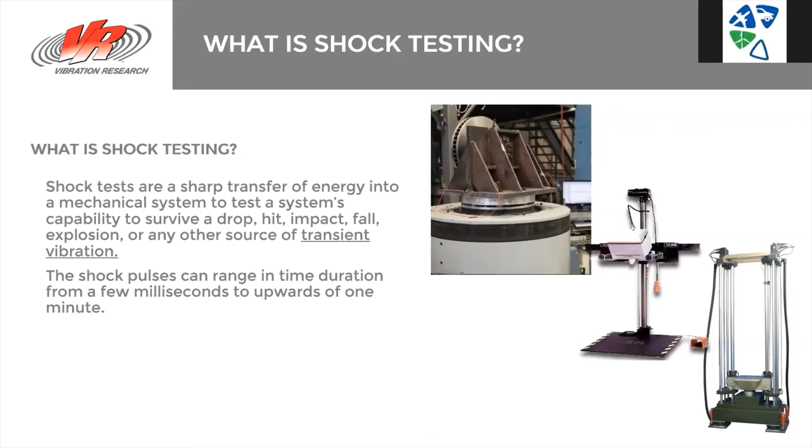Perfect. All right, so when we're characterizing a shock pulse, what are the things that we need to know about it? So number one is we need to know the acceleration of that pulse. We also need to know the pulse width, the duration, the rise and fall time. When we're analyzing the pulse, we'll analyze the velocity change. We'll need to know the pulse shape. Is it half sine, initial peak?

We'll look at the Fourier spectrum. So we'll also need to understand when we're running a shock test, what are the frequency domain implications of that test, right? And the frequency domain implications of the pulse shape that we choose. Also, we can look at SRS, the shock response spectrum. So defining the pulse not in the time domain, but in the frequency domain.

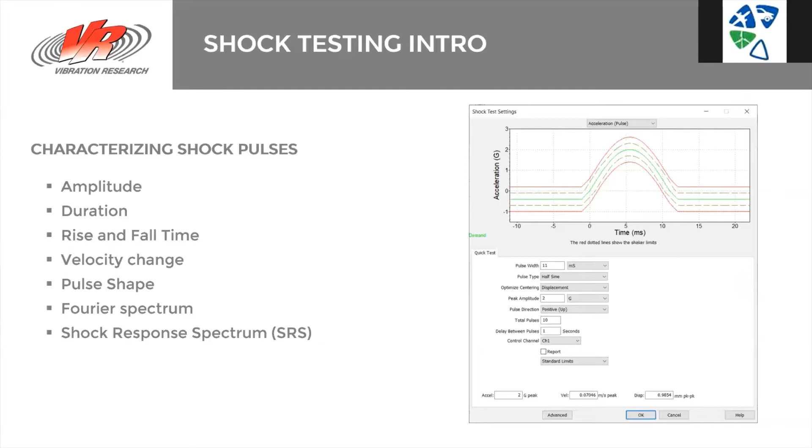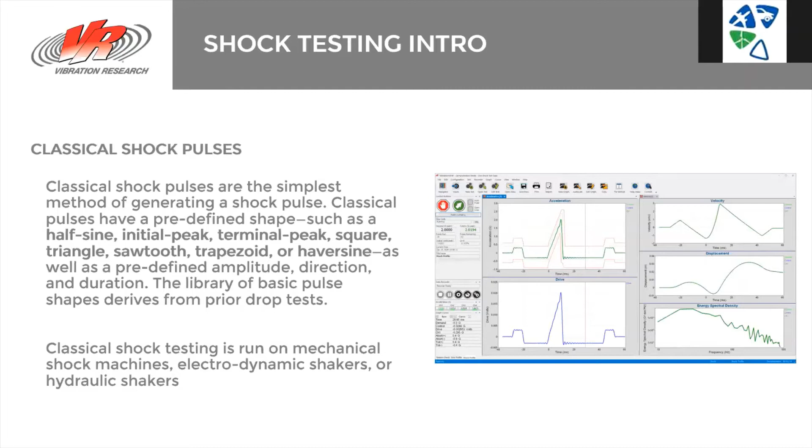Okay, so when we're talking about shock, what are the types of pulses that we commonly see, especially when we're talking about ones that are run on a shaker? Well, we see things like half sine, initial peak, terminal peak, square, triangle, sawtooth, all types of different pulse types. In the next few slides, what we're going to do is analyze those and see what's the benefit of running one or another. So let's get into the first one.

By far the most common is the half sine pulse. This is what we call the traditional method of shock testing, fairly easy to reproduce. The frequency response is fairly smooth, but what we see is reduced high frequency content, or what we call holes in the higher frequency. So what that means is if we have a product with resonances that are in the higher frequencies, if we're using this pulse, we may not excite those. So let's look at an alternative.

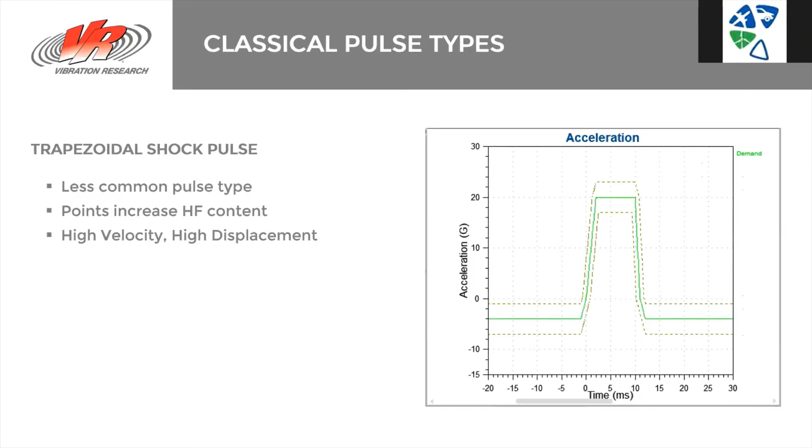So the terminal peak, also known as the sawtooth shock pulse, many of the newer test specifications are using terminal peak rather than half sine. And the reason for that is the sharp point and peak increases the amount of high frequency content. So what we see are fewer holes or a flatter spectrum. Then finally, another less common option is the trapezoidal shock pulse. And this further increases that high frequency content, but we also get high velocity and displacement.

So if we look at these three pulse types in the frequency domain, so we'll look here at these ESDs, we can see that the half sine is the green wave, terminal peak is the red, and the trapezoidal is the black. We can see here, if we look at the half sine, the green, when we get to the higher frequencies, so from 100 to 500, we start to see these big dips or holes in the frequency.

Well, if you remember earlier, we said that if you're running a half sine pulse, you may not excite some of the higher frequency resonances. And the reason is because of these holes. So for example, if you see a 150 hertz resonance on your product, well, if you ran this pulse, unfortunately, in this test, that would not have been excited with that shock test. So the most damaging frequency was not even being excited for that test. But if we look at terminal peak or trapezoidal, right here, we would still see the energy there, and that would still be excited during the shock pulses.

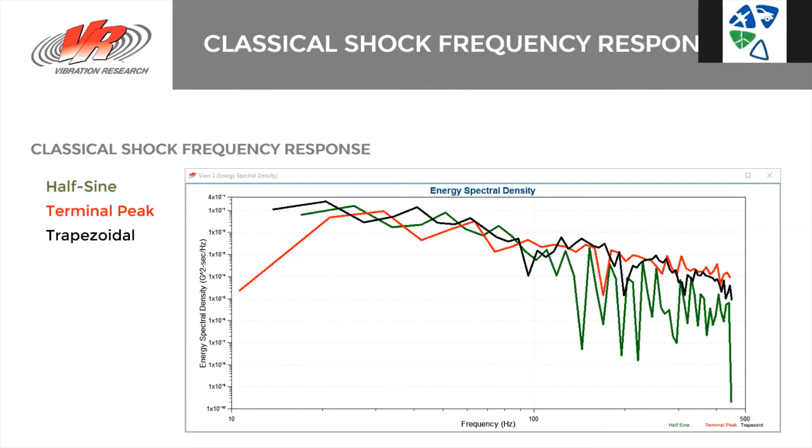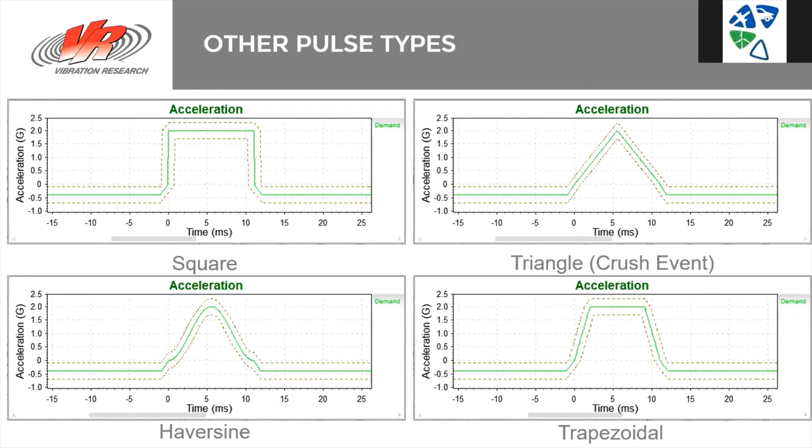Okay, what are some other pulse types that we see? Well, we'll see the square, triangle, Haversine, trapezoidal. And if we look at those, we can also analyze them in the frequency domain. And we see as well, they have different responses. Some of them have very high frequency responses. Some have more energy in the low frequency. But here we can understand how that pulse is going to affect our product.

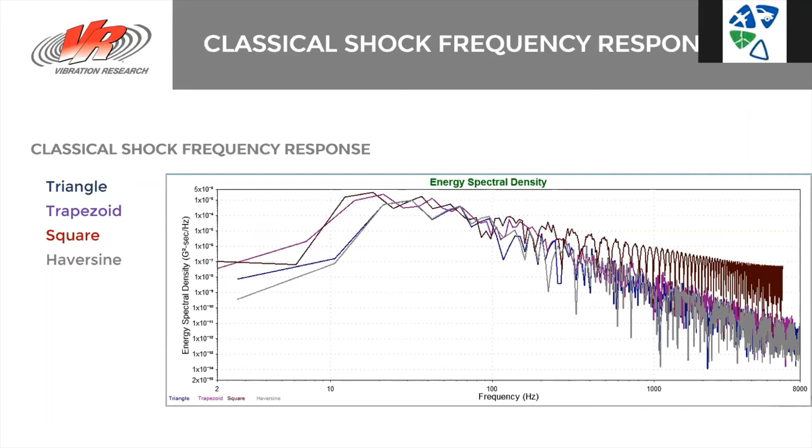Okay, next we're going to talk about the pulse compensation. And so if you've ever run a shock pulse on a shaker, you'll see that you don't only see the big pulse that we just discussed, right? You also see a little pulse before and after. Well, why do we need that? Why does that exist? Well, it's needed because we need to return the shaker back to the zero position, right? So at the end of the test, we want acceleration, velocity, and displacement all to return back to zero, right?

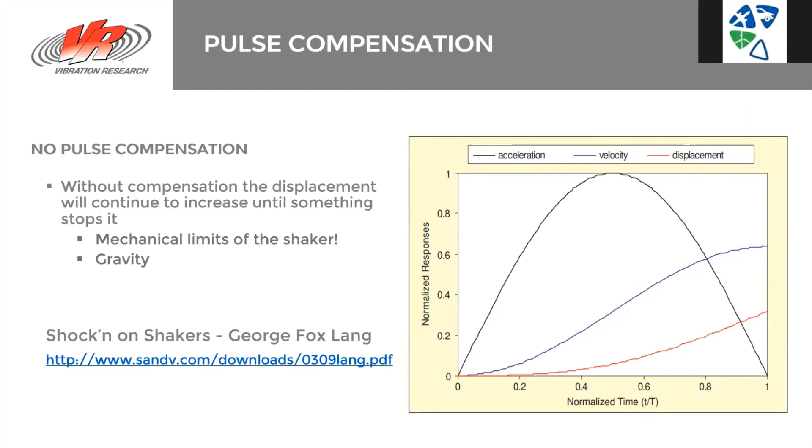Okay, so why don't we then just put one pulse after the main pulse? Well, unfortunately, if we look at it here with one big pulse, this is the acceleration, and then we see a little pulse at the end, a small burst of acceleration here. What we see is that the velocity returns to zero, but the displacement doesn't. So unfortunately, if we tried to run it this way, the displacement would not return to zero on our shaker with only one pulse.

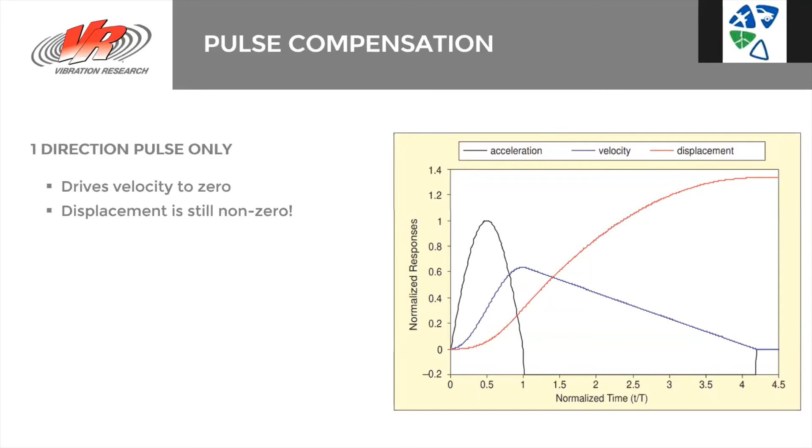Okay, so why would we ever purposefully do that? The pre-pulse only, there are some applications where they want to see what's happening with the product. So for example, a hard disk drive, what they want to see is that right after the pulse, the main pulse, is see if they can still read and write before there's another small pulse again, if you will.

Then also for post-pulse, for an airbag sensor, sometimes they don't want to give any type of pulse before the main one because they want to make sure that the main pulse is what's triggering it. They don't want to preload the sensor and invalidate the test. So there are some applications for tests that do not use both pre and post pulse compensation, but they're very specific.

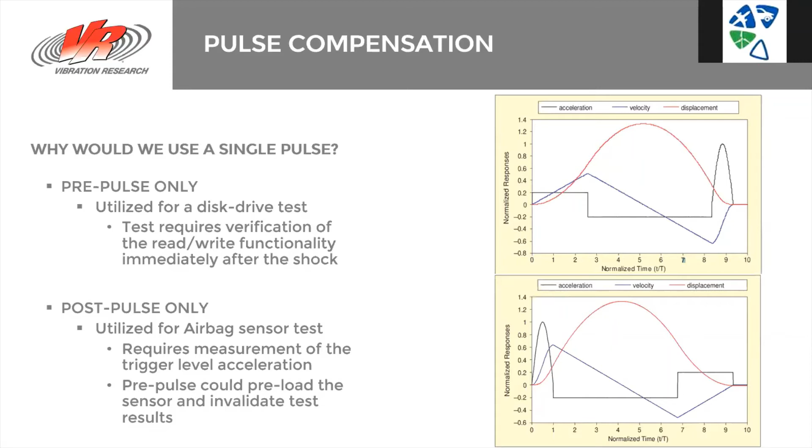Okay, so the typical shaker test, as you know, uses 2 pulses. As we can see in the graph on the right, we can see the acceleration, velocity, and displacement overlaid. As we run the test, all 3 acceleration, velocity, and displacement return to 0 at the end of the test, right?

So when we look at selecting this inside of the VibrationVIEW software, there are 2 options to the type of pre and post pulse that you can select. So one is what we call our smooth shape, and that's here on the top. And the next one is called our square shape. And one is designed specifically to reduce the amount of high frequency content that's added to the test, whereas the square shape is designed to be optimal for minimizing velocity and displacement.

Our default is the square shape. That's what's recommended. We also have these 2 without displacement centering. That would be for a very, very small amount of people that have an external device that is recentering their shaker.

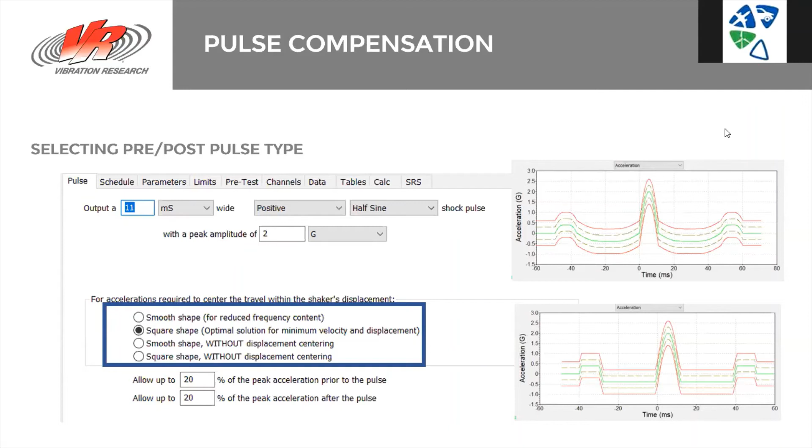Okay, so let's actually look at a video. So remember, we're not going to be able to visually see the acceleration. So what we want to look at is the displacement, because the displacement is what we're seeing on the shaker. So let's watch for displacement that goes up, down, up again, and then returns back to the original point. So let's look at this short video.

Up, down, up again. Up, down, up. So let's look at that one more time here. Let that finish up. Up, down, up. And so if you'll see right there, it's at the midpoint, goes up, down, up again, returns back to that middle point. And so the pre and post pulse allows us to get that nice transition that we're expecting.

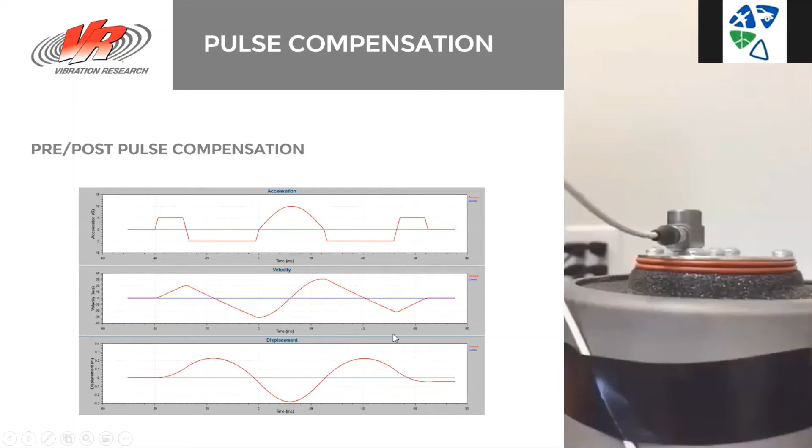Okay, what are some other things that we need to consider when we're running a test? This is something that we put on all of our presentations because we think it's very important to consider. This isn't only related to shock, but it's related to any of the vibration tests that you're running. So you need to understand that noise can cause many types of issues during your test.

So if you're having abort problems, anything like that, we'd recommend, especially if you're running low-level tests, so not high-level acceleration tests, you want to look at these 3 things. So eliminating ground loops, making sure your shaker, head expander, and fixture are designed with an appropriate resonance for the test you're running. And then also make sure you're selecting the correct accelerometer.

So here you might see ground loops in your lab. If you have a single grounding point in your lab, what that means is that you have all of the equipment, the controller, the power amplifier, the shaker, all connected together and then running to one single ground point. Instead, the controller is plugged in one spot, the amplifier in another, and now the only thing connecting them are my input cables and my drive cable, because we don't want current to be pulled through those cables.

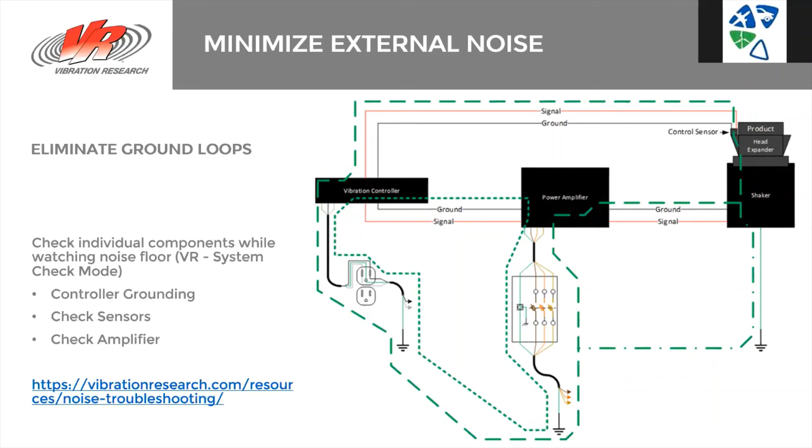Perfect. Again, we also want to understand what is the resonant frequency of my shaker, my head expander, and my fixture. You can do very simple sine sweep tests to understand the dynamics, but these are things that you should know already about your system so that your fixture is not moving during your test and causing inaccurate results.

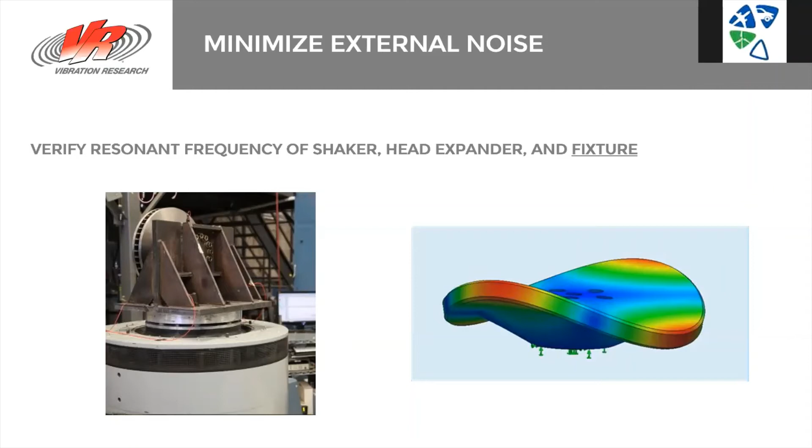Okay, and finally, for all test types, you want to make sure you're selecting the proper accelerometer. So work together with your distributor. CTEC is selling Dytran accelerometers.

If you're looking for an accelerometer, make sure that you're buying one for the purpose that you're going to use it. So make sure that the acceleration limits are correct for that test. Make sure it's designed to support the frequency range that you're going to be exciting in the test.

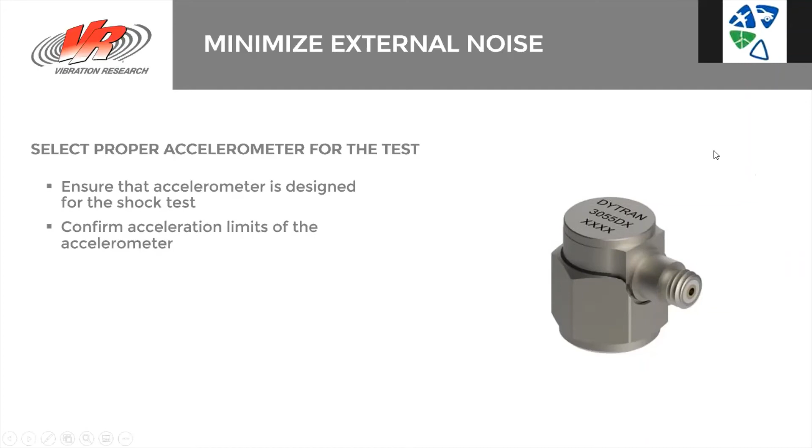Okay, back to the shock world here. Let's look at entering a shock profile. What are the things that we need to know? So in our software, when you first open a shock test, it'll open to what we call our quick test mode. And so this is set up with the minimum amount of information that we need to be able to run a simple shock test.

Because it's very easy to accidentally enter one number wrong, but fortunately, you'll sometimes see that show up as a very large displacement, or maybe the acceleration looks huge. You'll be able to catch a lot of errors that way.

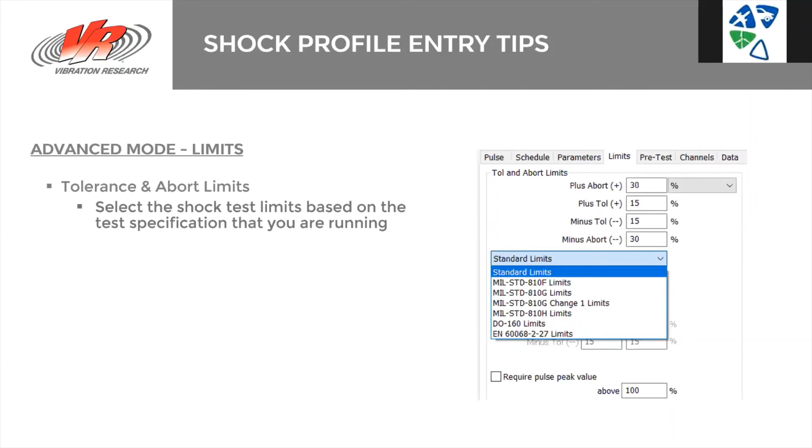So here's an example. Between MIL standard 810G and MIL standard 810F shock test, you'll see that they've significantly changed both the tolerance and the abort lines. And so to make sure that you're running the test correctly, based upon the specification, make sure that you're selecting the correct tolerance and limits.

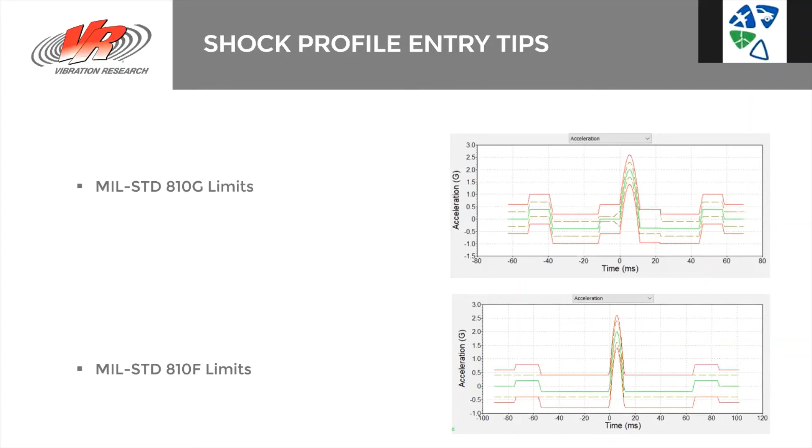Okay, what are some of the other parameters that we need to configure? I won't go too deep into these, but you need to configure the feedback control. And what the feedback control is, it tells us how big of a jump to make when we're doing the startup pulses. So as you know, the controller doesn't just directly come out and do a full pulse, right? It has to come out and start with a little pulse and make it a little bigger, make it a little bigger, learn about the shaker, right? And so that's what the feedback control will do.

Next, we have filtering, which will allow you to remove unwanted frequencies. So especially with our integration and differentiation filter, what that does is, especially when we're converting and calculating the velocity and the displacement, we need to make sure that those unwanted frequencies aren't coming into our data. Next, we can set sample rate.

And finally, one useful feature here, if you're testing products that have some type of ringing or some type of response after the pulse, you can capture additional time after that pulse. So an example would be if you imagine something like ringing a bell and that bell rings for some time. If you wanted to capture all of that after the initial pulse, you can add that time here. So that's one tip to get more time after the shock pulse.

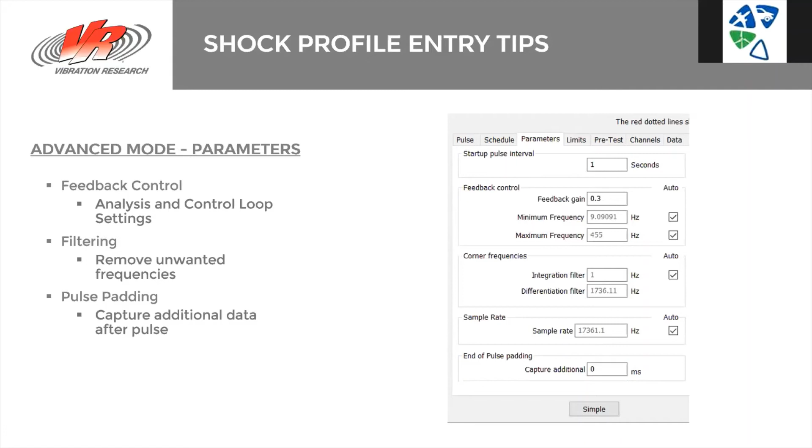And so whenever we talk about shock, we also like to make sure that we let you know that we do not recommend that you run multi-channel control for shock tests. And there are a couple of reasons. One, it actually puts your shaker at risk for damage. We can apply the system limits to multiple channels, so that does protect it to some extent. But if there's some nonlinearities in the placement, you could have an issue with the shaker. So use only one control channel when you're doing a shock test.

Another possible issue is because of the phase difference between the locations of the accelerometers, that can cause issues with control. So use one control accelerometer when you're running a shock test.

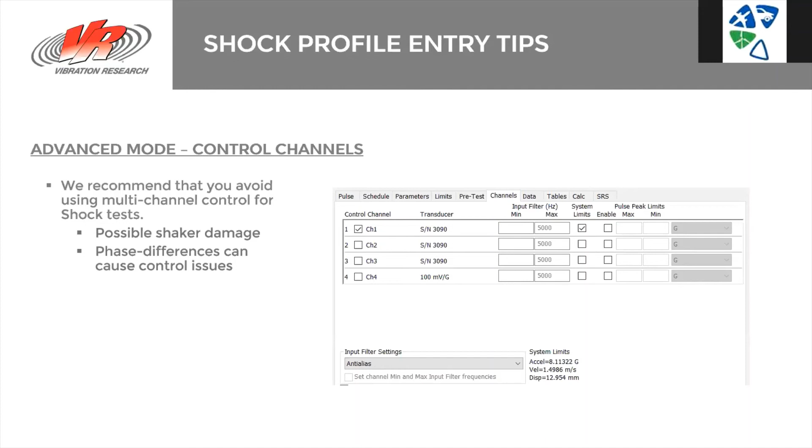Okay. Now, another tool that can be very useful is what is called the memorized drive. And what is memorized drive? What it does is after you run a pulse, it can remember what the drive signal was like for that pulse. And so next time you want to run that same pulse, you don't have to wait for those startup pulses. So this is very, very useful for applications like a satellite, where we want to only subject the satellite to exactly the shock pulse that we want for 10 times. We don't want 3 smaller pulses before that we have to consider in our analysis. We only want the 10, right?

So what we can do is, instead of putting the satellite on the shaker, we put a dummy weight, a weight that is the same as the satellite. We run one pulse, and then it'll memorize the drive from that pulse. We'll stop, and then you remove the dummy weight, put on the satellite, and now you can run the test, and it will just run 10 pulses because it will have the drive already memorized.

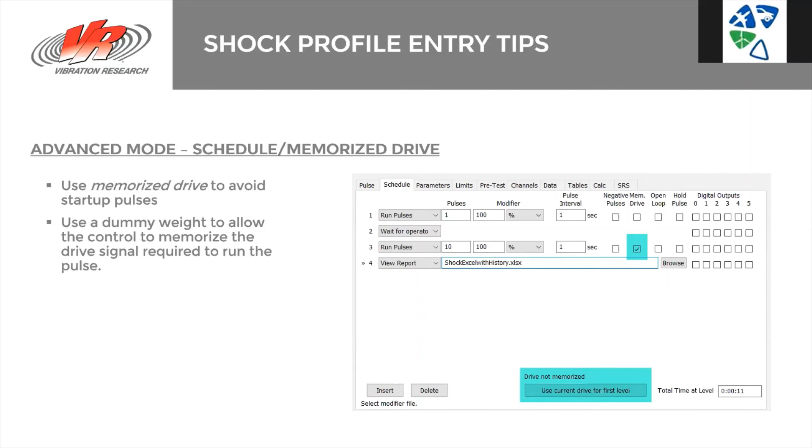Yep, perfect. And one thing that's very nice is you only need to do that once. So you can use this use current drive for first level button. And once you do that, what it will do is it will save that drive signal with the profile so that the next times you run the test, anytime in the future, it will still remember that drive. So you don't need to do the dummy weight every time. So this can benefit all types of tests.

Next in the data, what are some interesting things, tips that we can do? One thing I would recommend is if you have to document the data from every pulse, you would come into our data tab and select every one pulse. So we do that. And then what's really cool is inside of the software, we can then very easily overlay all of those pulses either in our software or in Excel.

And so if we were doing that in Excel, what we could use is there's a template that exists that would automatically take all of the 10 pulses and it would throw all the data in. It would show you each pulse and then also overlay that as well. So I'll show you what that looks like here.

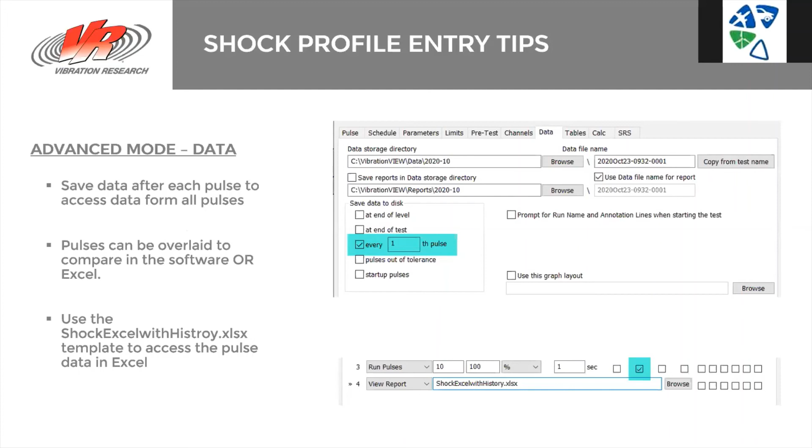If you want to overlay the pulse data in Vibration View, and this works with any module, so sine, random, shock, you can use our paste from file feature. And in here, you go into edit, paste from file, and then you select all of the shock pulses that you would like to display at once. So once I select those, click open, it's automatically going to open with all of those pulses overlaid.

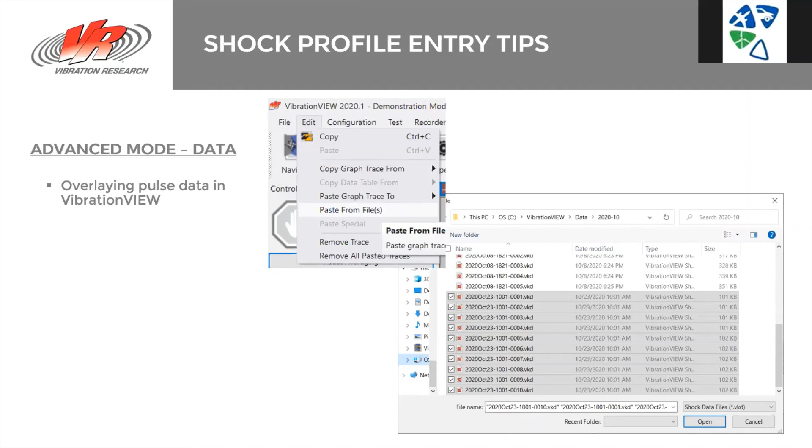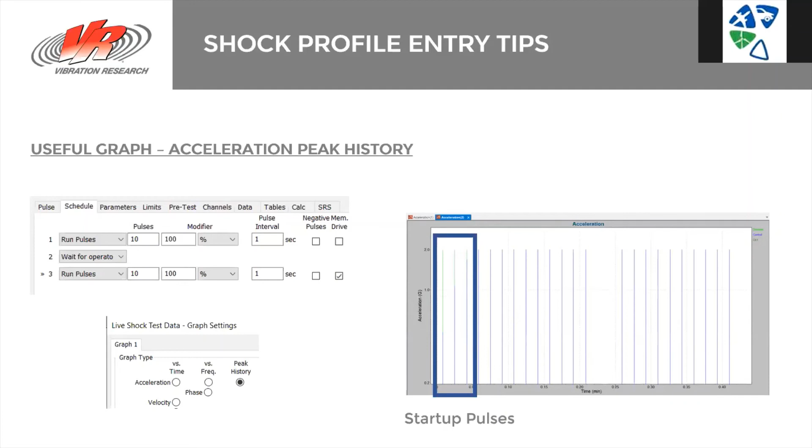Okay, finally, we're moving on to our last section, and this is just a quick conversation about transient capture. Transient capture can be done with the VR9500 controller, and can also be done with the ObserVR1000 product that we have. But this is where we're not typically doing any type of control, we're just measuring. So our goal is to capture the data from transient events using some type of defined trigger.

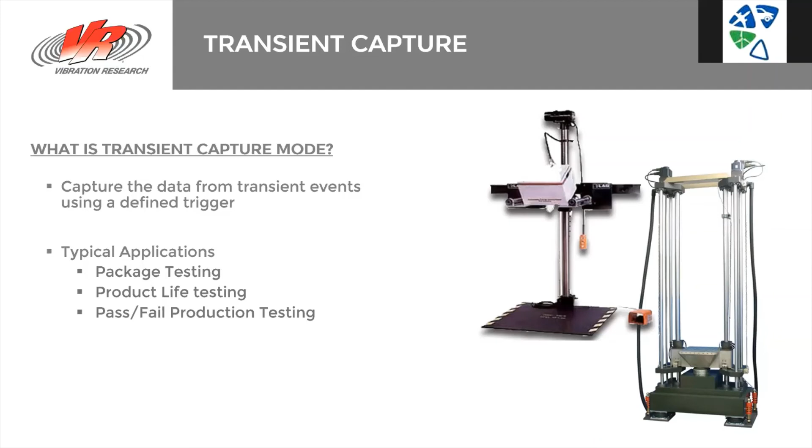Okay, because we're not outputting any signal that's being reproduced on a shaker, how do we define the pulse shape when we're doing a drop shock test? Well, it's defined by the pad material that we use for the drop shock machine. So for example, here a half sine is produced by a flat elastomer drop pad, whereas a sawtooth is produced by a lead drop pad. Square and trapezoid are produced by air cylinders or crumple material.

Pulse width can be defined by heavier objects, which will generally see a wider pulse. Then overall, of course, pads, the product itself, the frequency content present, the drop height, and if you're using some assist mechanism like bungee cords to achieve higher accelerations. So the design, the pad, this is all playing into what that shock pulse will look like.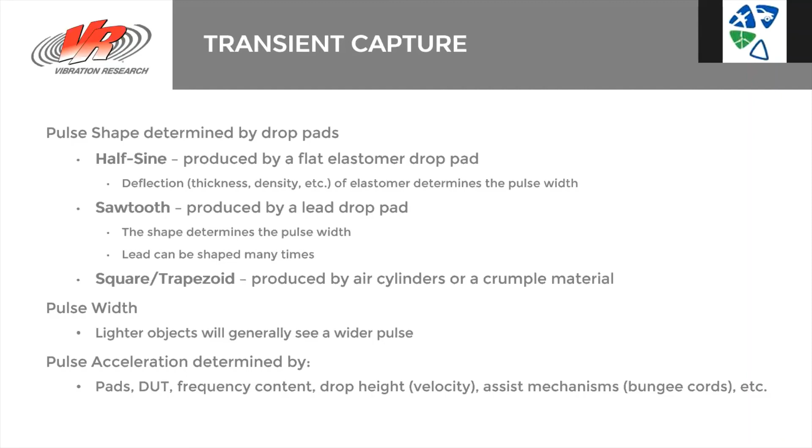Okay, so what are the things that we need to configure when we're running a transient capture test? Well, we need to define a trigger. We can trigger on any channel, we can select a level, and then we need to select a slope for that pulse. We need to select the capture window: how much data, or how much time, are we going to capture, and how much before that trigger is reached, the pre-trigger. Should we only take one pulse? Should we take many? Should we hold off between pulses?

Do we need a filter? If we don't filter out our high frequency data, can it cause aliasing that will show up in lower frequencies? We also need to make sure that our sample rate is at least 10 times the analysis frequency, to get the most accurate result possible. The faster we sample, the more accurate the peak should be when we're looking at a pulse. Frequency analysis also defines the analysis range we'll be looking at in the frequency domain for that pulse.